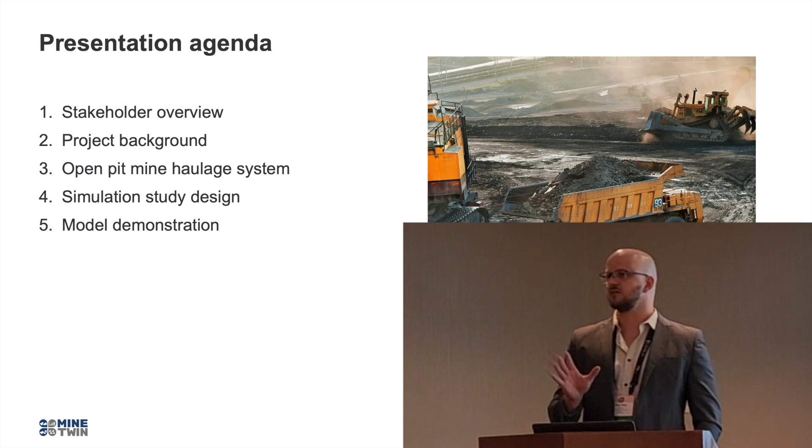Then we're going to have a look at the simulation study design. We're also going to do a very brief model demonstration of MineTwin. We're not going to focus much on the tool itself, just on the parts that were used for this specific study. So it's going to be very brief.

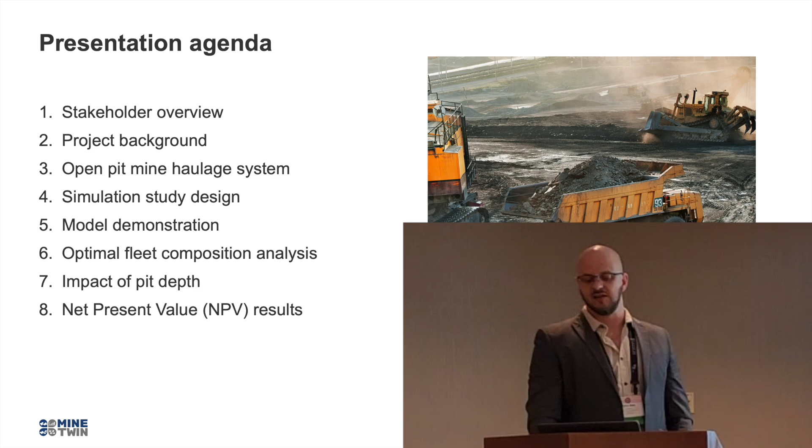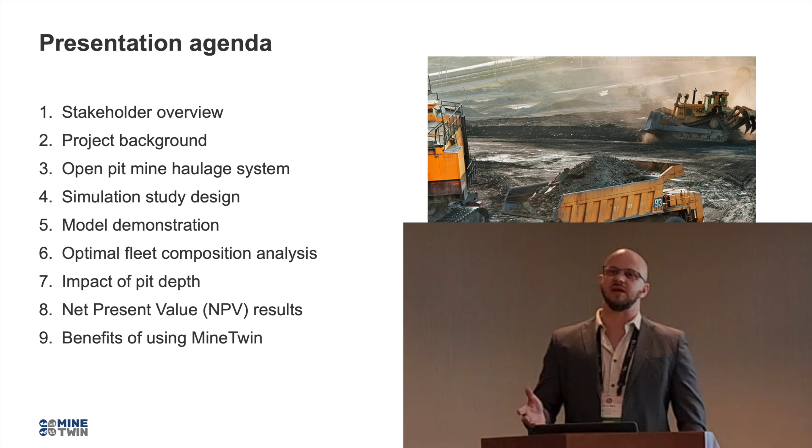We're going to look at the optimal fleet composition analysis, because that, we'll see, is the biggest thing here: what is the optimal fleet for this specific question when you've got manned vehicles and you're moving them to autonomous. We're also going to look at the impact that pit depth has on this question, and specifically the net present value or NPV results from this whole study. And then we're going to do a brief overview, if there's still some time, of the benefits of using MineTwin compared to industry standard and general simulation tools.

So a little bit of background about the project. It originally started with Pronto AI. They deliver off-road autonomous haulage systems, or AHS, and they specifically focus on rugged environments, specific industrial environments as well as mining environments, and also specifically on small vehicles. They managed to bring the cost of automating a small truck and other equipment down significantly compared to bigger trucks. And they wanted a research study to test the financial and operational impacts in mining of moving from big manned trucks to smaller autonomous vehicles.

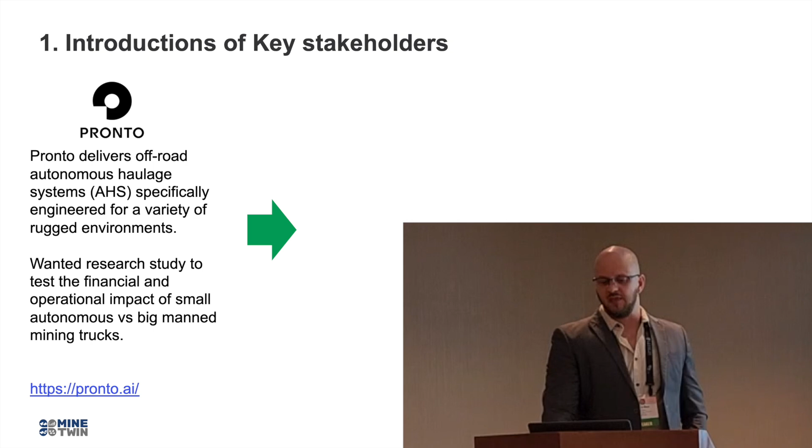And they approached Whittle Consulting to do this study for them. Now, Whittle has this integrated strategic planning, which is an approach that they've used for long-term mine planning, and it considers all parts of the value chain, everything from inputs back into the community to what your mining rates are, to what the life of mine is, to how your pit shell should be designed, how many shells you should have, etc. But for this specific study, because it's kind of new and there's no information available about exactly the number of trucks or excavators for specific setups, they required a detailed simulation to accurately calculate the NPV for the research study.

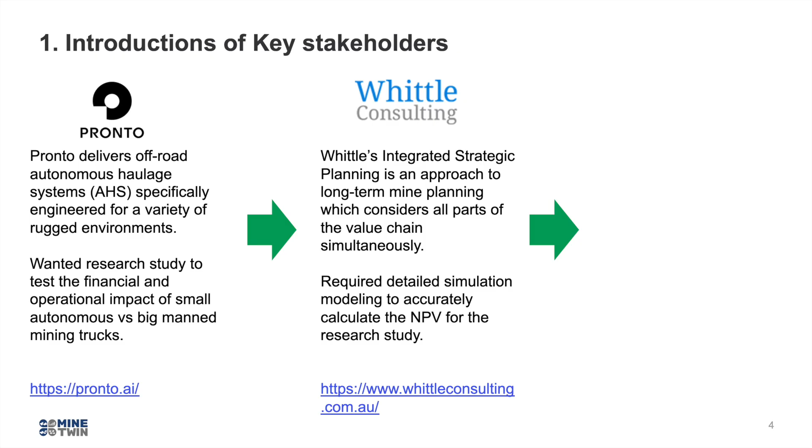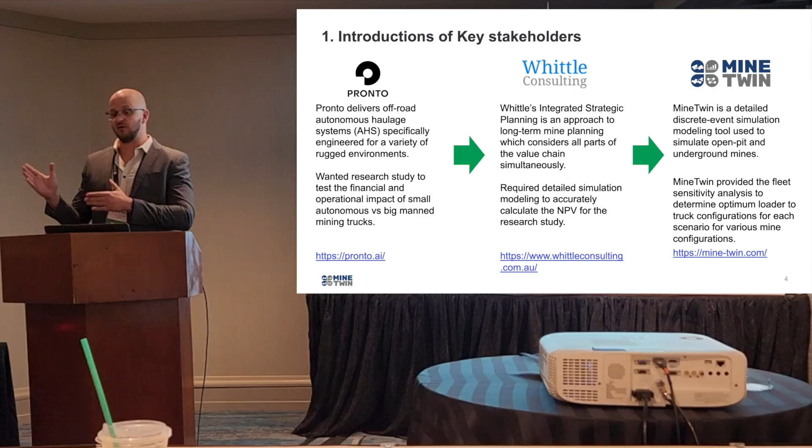And then Whittle contacted us and said, we need a detailed discrete event simulation modeling tool so that we can test all our assumptions and find the optimum fleet configuration. Now, MineTwin is able to simulate both open pit and underground mines, and we provided them with a tool to do this sensitivity analysis and provide the optimum, or the ranges for the truck and loader configurations, for various stages in the life of mine. So I'll hand over to Andrey to talk a little bit more about the background of the project.

Yeah, so what is the object of interest or system of interest? We were asked to compare medium manned versus small autonomous trucks. When I say medium, it's actually quite a big thing. It's a Caterpillar that can carry up to 100 tons, and it's typically paired with that type of excavator, and it's manned.

What is small autonomous trucks? It's still quite big, right? It's small relative to the other mining machines. It's 40-ton Scania that have been chosen to be paired with this Hitachi shovel that's autonomous. That's actually the type of trucks that Pronto guys can automate. Obviously, there's trade-offs that we needed to resolve with the simulation somehow.

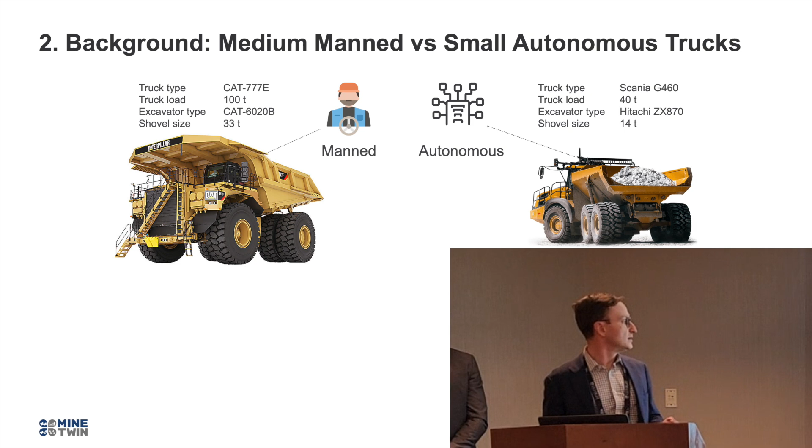So, industry have historically chosen to use the bigger trucks in the mine. Obviously, there's 450 tons in the trucks in some mines, but the bigger the truck, the more efficient the transportation is, the more there is the fraction of the ore that you are hauling upwards as compared to the mass of the truck itself, the mass of its fuel, etc.

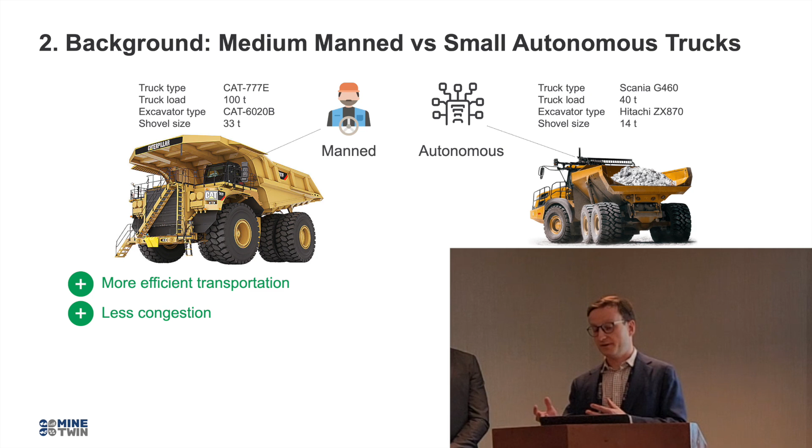So obviously there's less congestion, as there's less moving parts, less probability of congestion, but the negative factors here are human factor delays because they are manned, all sorts of human factors, we factor that in. Uneven truck speed, that's a serious problem.

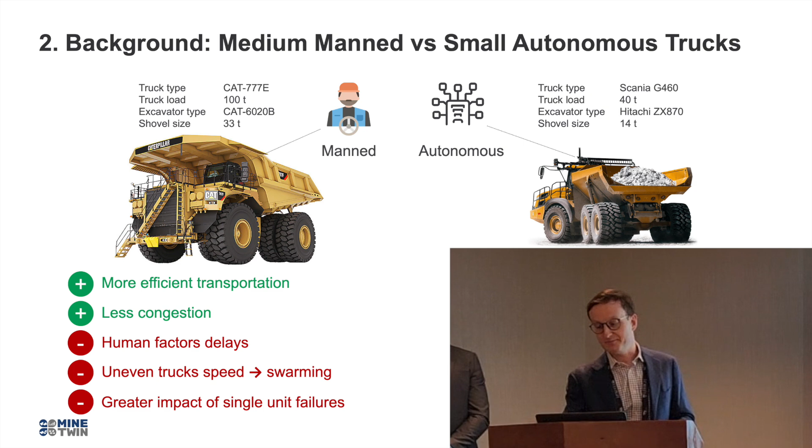That's not very evident on the surface, but all the manned trucks actually drive with different speeds, and if they queue or if they swarm one after the other, they all arrive to the dumping point at the same time. There's additional queuing because of this, and obviously the greater impact of single unit failures. So these trucks are designed to be very reliable because the bigger the truck, the more the impact of its failure.

So uniform speed on the other side, right? If we automate the trucks, be it a large truck or a small truck, we get more uniform speed, probably less queuing, less human factors delays, but we need more excavators because, as you notice there, we need smaller shovels, so we need to buy more of them. How much more, we'll see very soon.

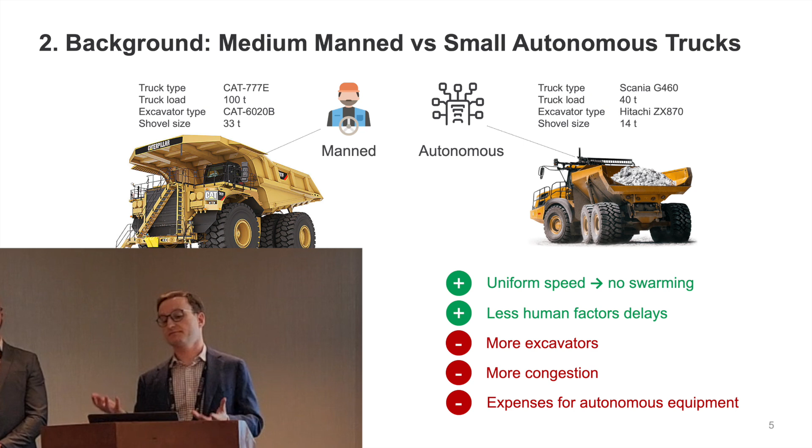And there's going to be presumably more congestion because there's a lot more moving parts. And statistically speaking, there must be more congestion, more queuing in front of excavators, in front of dumping points elsewhere. And then expenses for autonomous equipment, etc. So this has to be considered during the NPV calculation as well. So we use the simulation to actually resolve this trade-off and determine which is the best option.

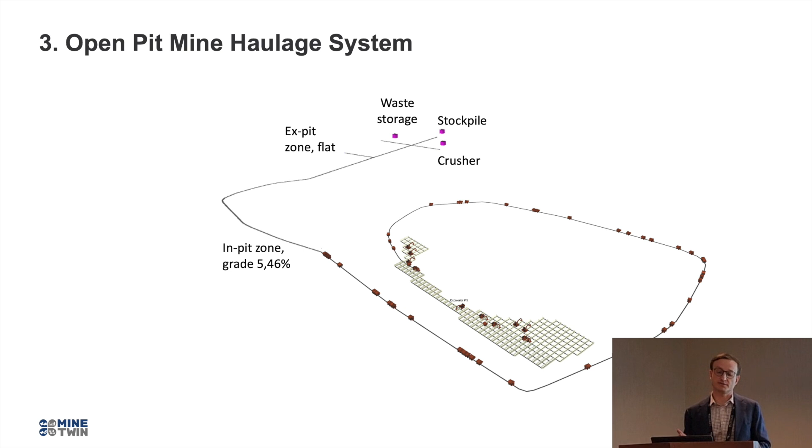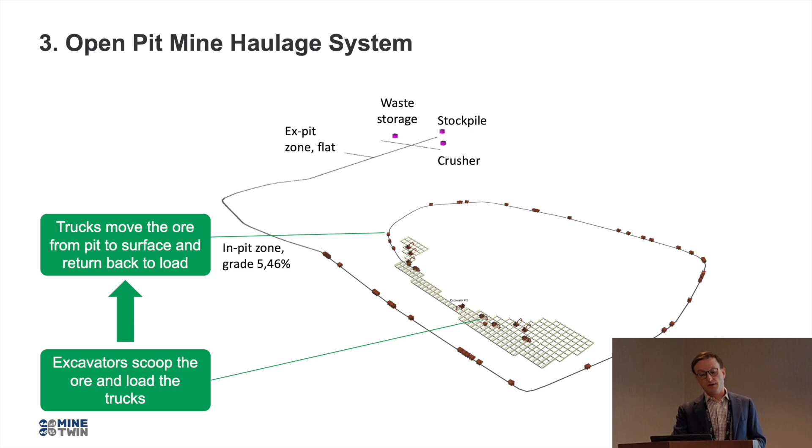So open pit mine haulage system, how it looks like. The very bottom part that looks like a grid, there's actually a grid of blocks where the ore is being excavated. The excavators scoop the ore and put it on the trucks. They travel further upwards. The typical grade is 5 to 6 to 7%, and they travel to one of the destinations, depending on what they mine. It can be a waste storage stockpile or crusher, and obviously this is the flow of the ore.

And what we are interested in simulating is trucks queuing at unloading points, planned and unplanned stoppages. Of course, in the autonomous case, there must be less stoppages due to human factors, less shift breaks, etc. Then trucks queuing at excavators, the biggest problem in mining probably. Excavators waiting for trucks, that's the opposite problem. You'll see very soon what the analysis behind this is. And then trucks swarming somewhere here. So these are all the effects that we needed to simulate.

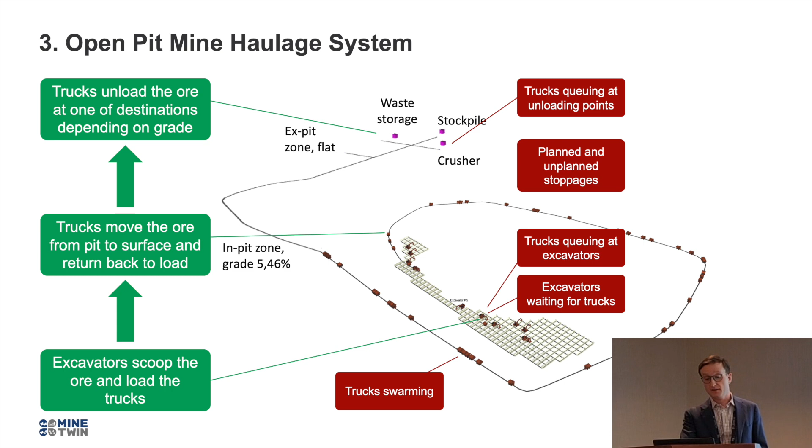So what was the design of our simulation study? We took a sample ore body together with Whittle Consulting guys, with drill and blast open pit mining technology, typical North American setting, copper style ore body. We took the three destinations: stockpile, crusher, and waste storage. It can be sometimes 2 destinations, but we took the setup with 3.

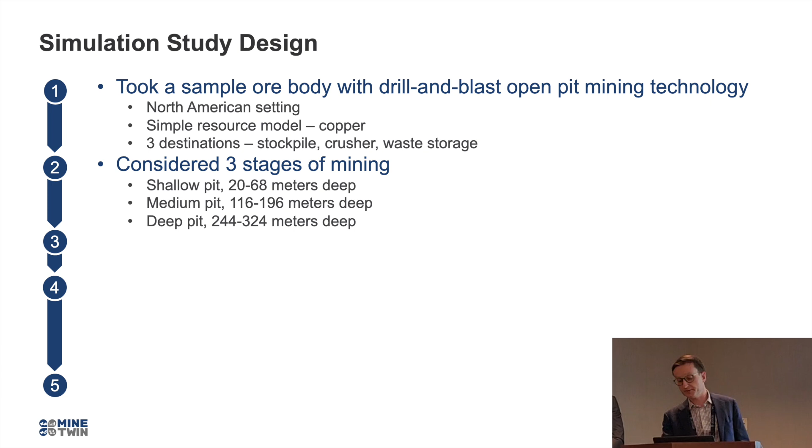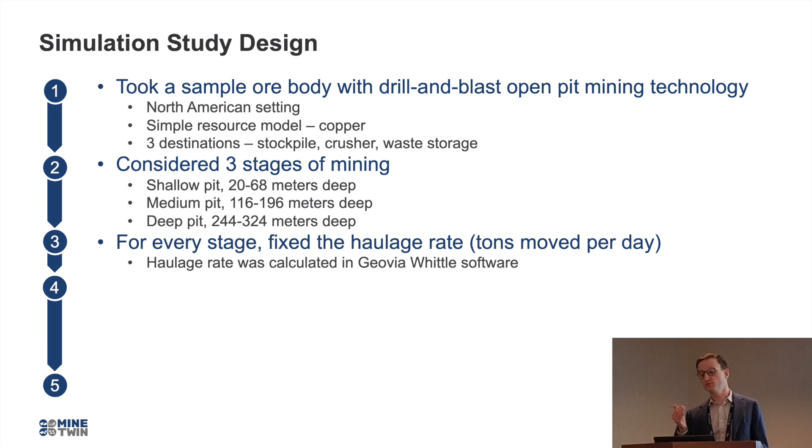We fixed that, and we ran experiments in MineTwin to calculate the required number of trucks and excavators to reach that same haulage rate for every case. And we had several cases, like four fleet types, which is 100 tons, 40 tons, manned and autonomous. That gave us four fleet configurations.

We ran them for all the three stages. For every combination of fleet type and stage, we varied the number of trucks and excavators. Obviously, we applied some replications to find the required number of trucks and excavators to sustain that haulage rate.

Then we externally took the results of the MineTwin simulation and calculated NPV in Excel, because obviously Excel is probably still the best tool for economic models. So we factored in factors like capex, prices, rock movements, etc. So let me hand over to Jaco-Ben.

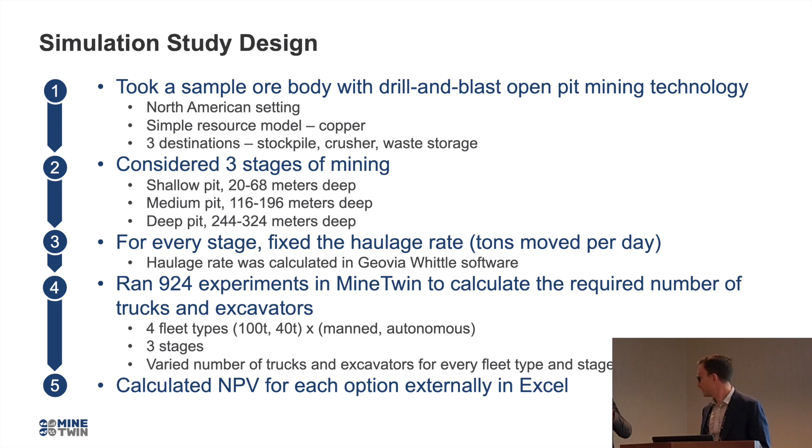So this is the editor view of MineTwin. On the left-hand side, you can see all the data that we read in from a scenario file. The scenario file is just an Excel file. You don't need to go and change anything in the Excel file. It's just the format that we chose for our scenario. Everything is data-driven in here.

Everything from the routes, which you get either from a DXF file or a Deswik file, or you can draw it in manually, all the block data, all the material, all the equipment gets set up in here. So it is the same MineTwin tool that you will use to simulate any kind of open pit or underground mine. So in the editor view, you get to make all these changes.

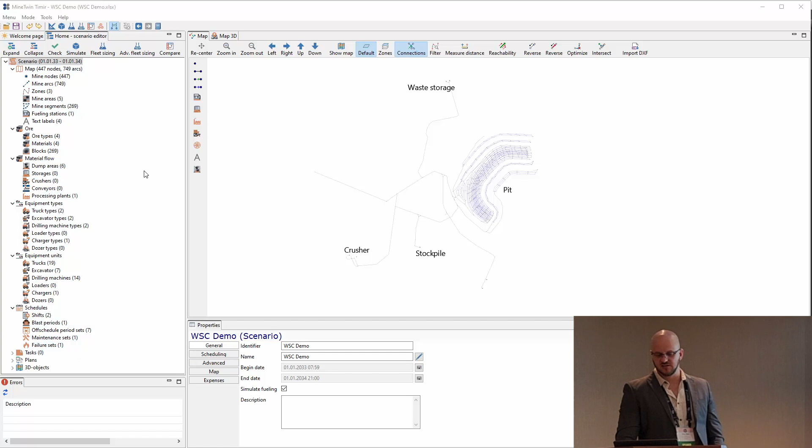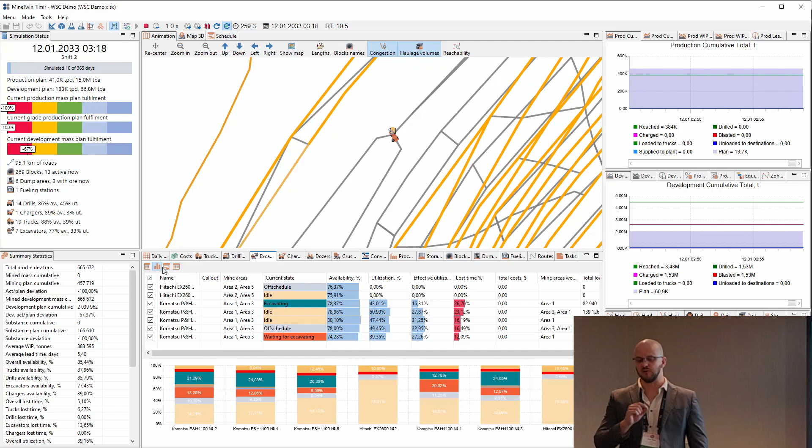Once you're ready, you hit the play button, and now the simulation gets created. There's a scheduler that runs that assigns equipment to different locations. Those yellow parts there are blocks. You can see the excavators going to these blocks, starting to excavate, a truck going up to it, being loaded.

Here in the view at the bottom, we've got Gantt charts that tell you in detail what every piece of equipment that you've selected has been doing, or is planned to do based on the scheduler's algorithm, or is currently doing. Literally, it started at 02:48, it excavated for 6 minutes, loaded into that specific truck. Then you can also view this for every other piece of equipment.

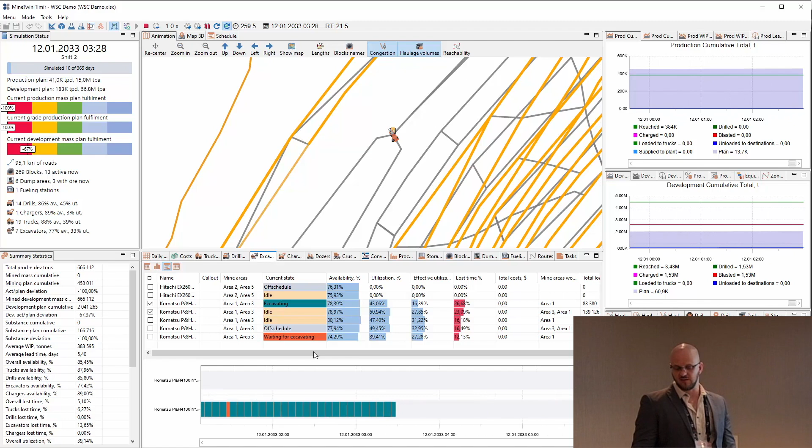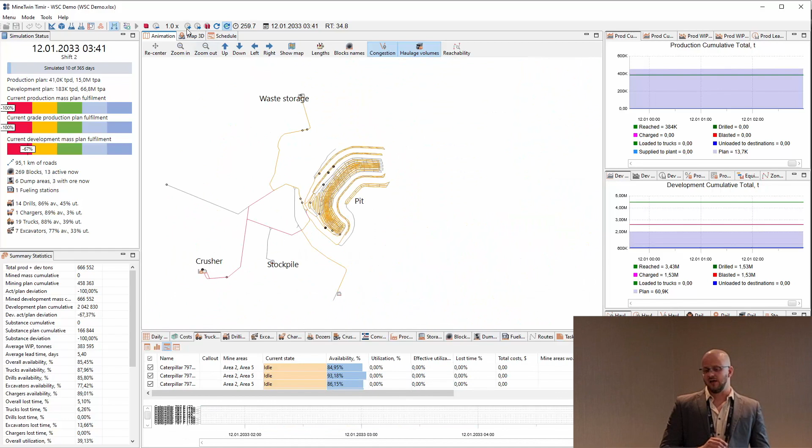So if we look at the trucks, we can see the stacked state charts for how much time they spent in each state. We can click on pretty much anything inside the application to view their current status. There's also a nice 3D view, and here we imported the geometries, the surfaces, so you can get a better visual view of what is exactly happening in your model. So that's really nice for verification and validation.

If the client, or in this case Whittle Consulting, wants to make sure that the way we are mining makes sense. Like, are we mining the benches in the right order? Is it valid what we're simulating? Right? So you really need that 3D view so that it can be verified and validated.

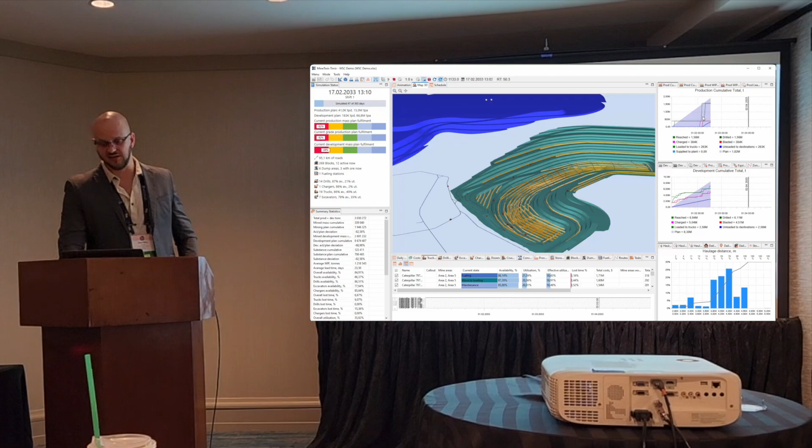The next video is just showing you a little bit more detail about how deep you can go into this. On every single piece of equipment, you can click on it, and it will tell you what it is currently busy with. So this top one is loading, that one is moving to loading, moving to unloading. It tells you how many tons it's carrying, what's the availability, what's the utilization.

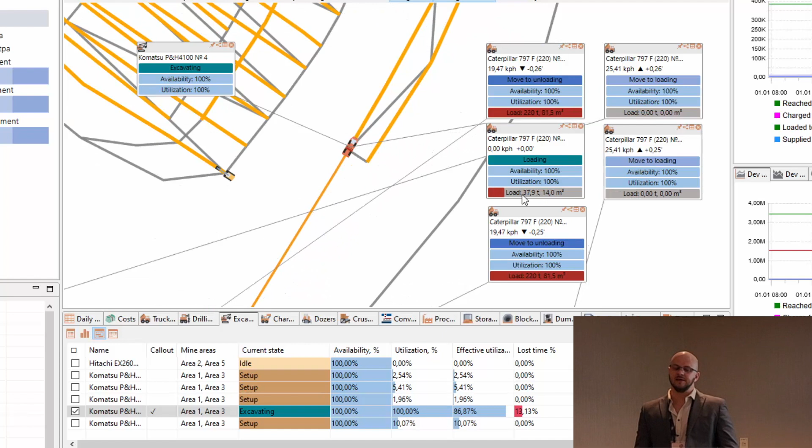You can fix these little pop-ups, and then the line follows the equipment, or you can follow the equipment by default. So there's really an intense amount of detail available for you in the UI that you can use to make predictions, to analyze your current situation, etc.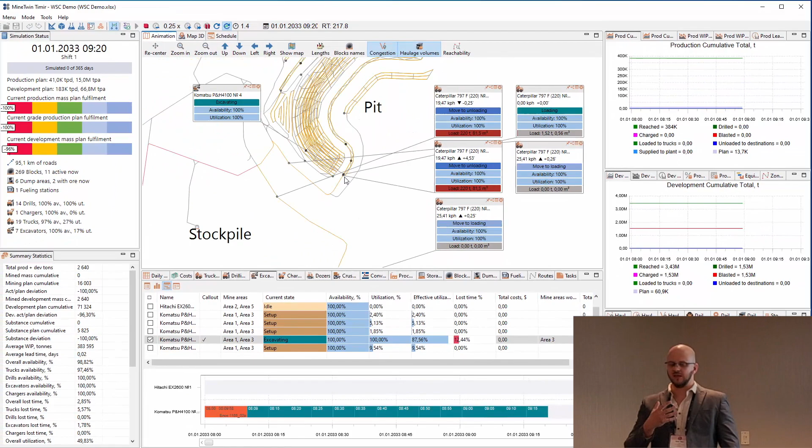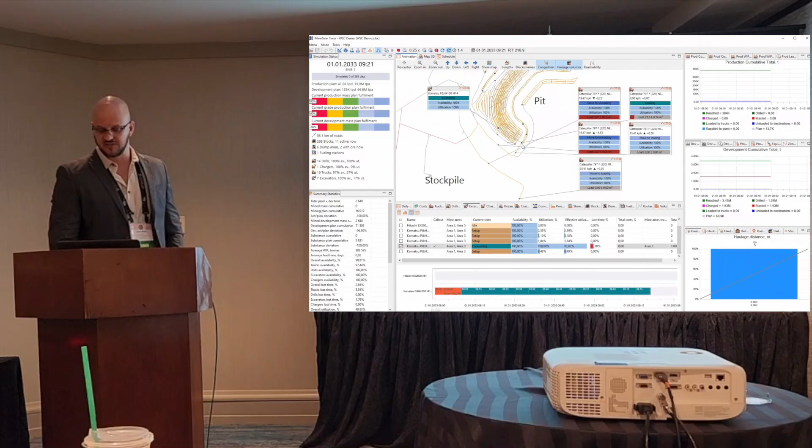But when we get to actually running those over 900 different experiments and replications that Andrey was talking about, you can't run it in this environment, it's going to take forever. Right? So there we set up some batch runs on our server, and we eventually get the massive text file or an Excel file with all the replications and averages, and we analyzed it. And now we need to make a decision on what is the optimal fleet composition for each one of the slices of time that we simulated for the life of mine.

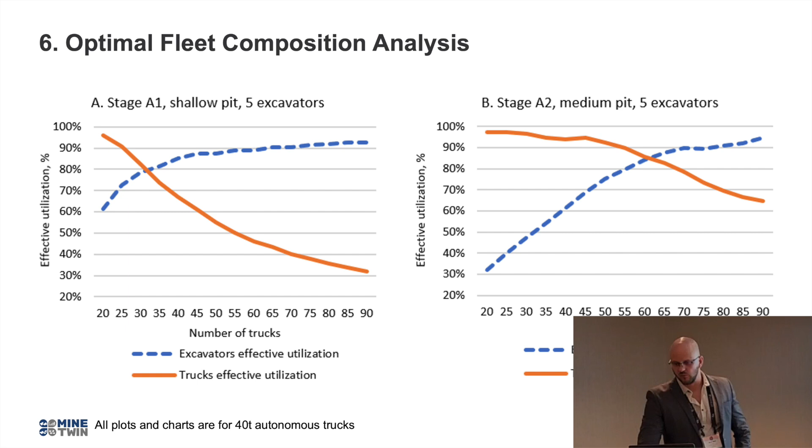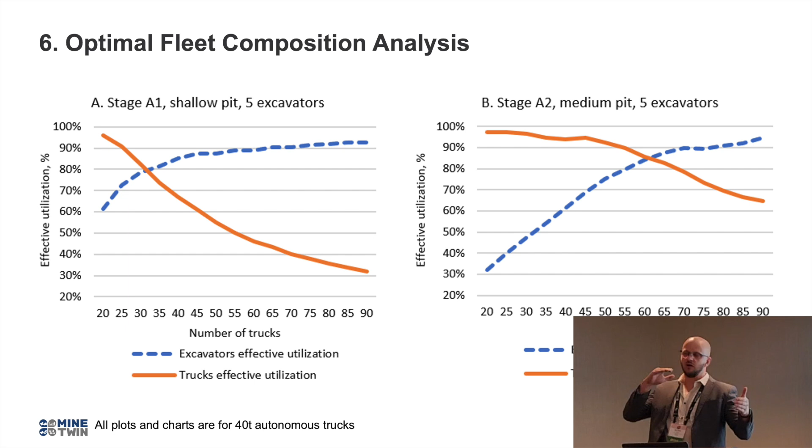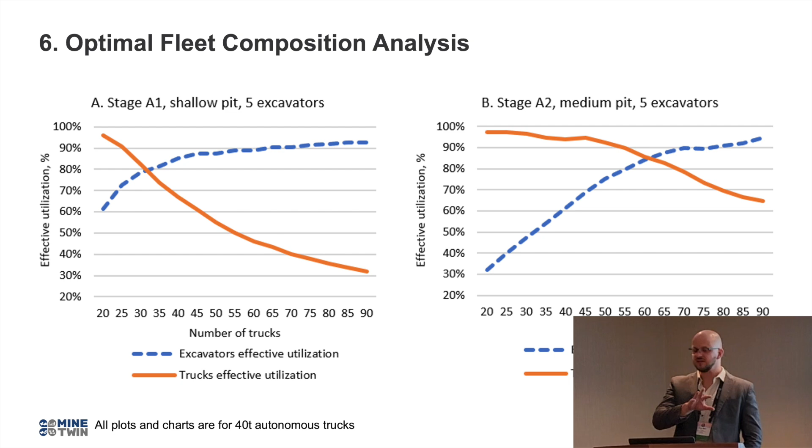Now, we only stop benefiting from adding additional trucks around 60 trucks. And it makes kind of sense. We've extended the distance from the dumping area all the way down into the pit. So we essentially have a longer pipe to fill with trucks to make sure that we do not starve the excavator, right? So in the beginning of the life of mine, we will get by with like 30, 35 trucks, and in that case, 5 excavators. But towards the deeper part of the pit, we actually need to have more trucks to make sure we do not starve the excavators. And this is just 2 of the depths that we actually simulate.

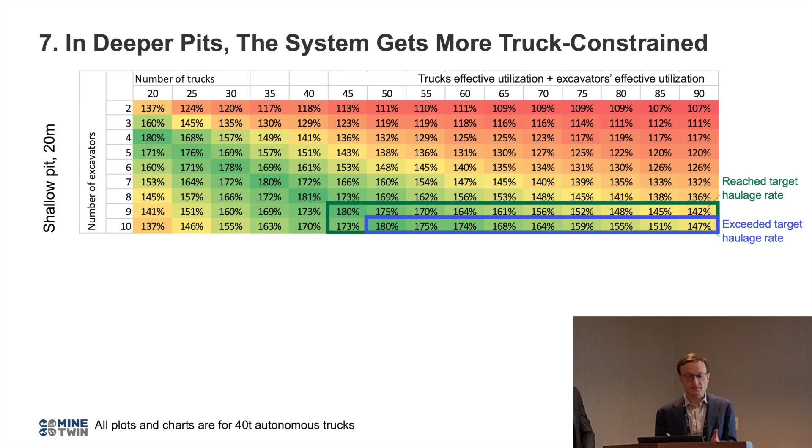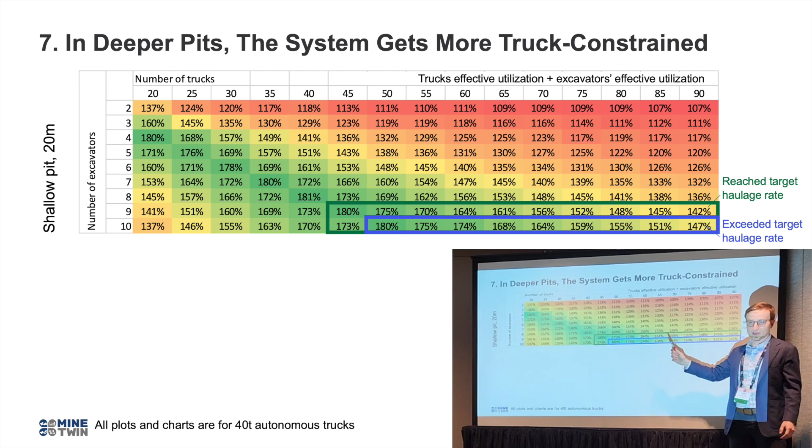So we can look at basically the same data from a little bit different perspective. That's a different type of diagram that presents conceptually the same data, but shows what exactly we did within this study to achieve the goals of this study. So in the cells here, there is a sum of average effective utilizations of trucks and excavators. Obviously, the theoretical maximum was 200%. The greener the cell is, the more effectively we are using our fleet of trucks and excavators.

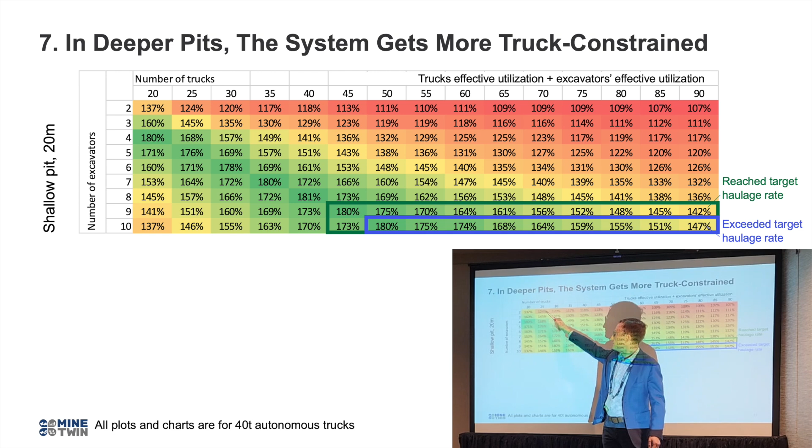So green is good. And you can see here, we are able to use our fleet quite effectively if we have just 20 trucks and 4 excavators. So we'll be good utilization-wise. But ton-wise, we will not be reaching our target. Remember those fixed haulage rates that we compared ourselves against. And obviously there's a haulage rate associated with every cell.

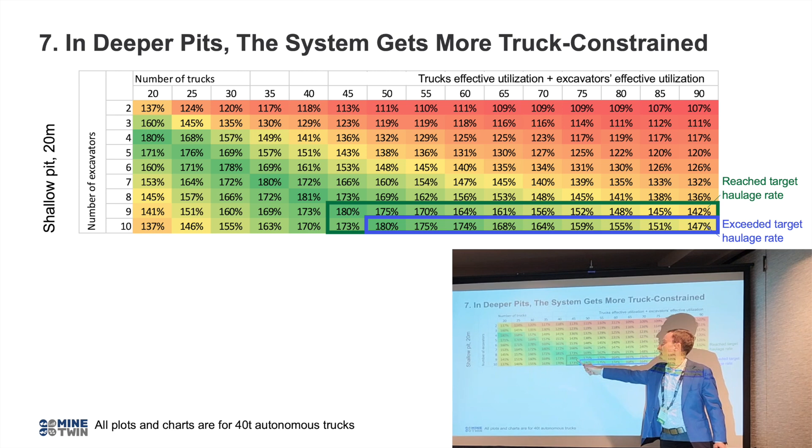Here I just put this green frame to highlight the cases where we were able to reach our target haulage rate. So this is to say, with 45 trucks and 9 excavators utilized quite efficiently, we are able to reach our haulage rate.

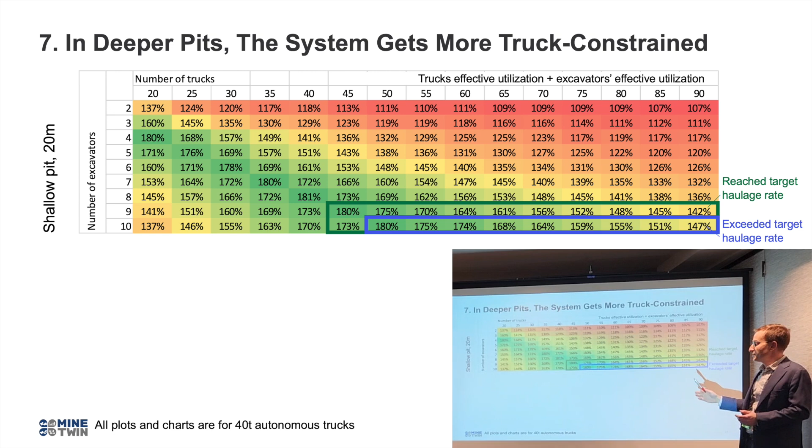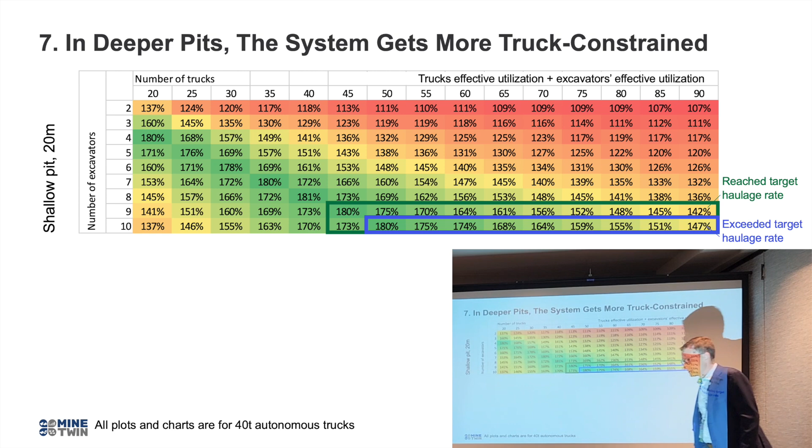And this blue one shows the area where we exceeded the haulage rate. We don't need these cases because we want to compare apples with apples. So we did this analysis for small autonomous trucks, which this picture shows, and the big trucks as well. But here, the second picture is the same small autonomous trucks, but the deeper pit.

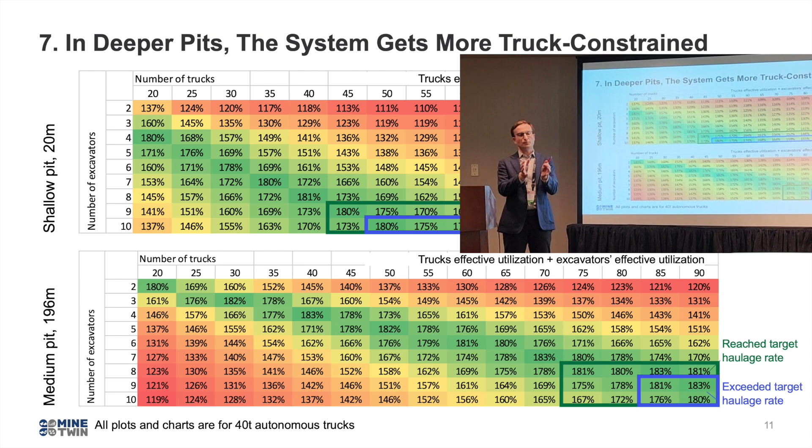So we now went deeper into the pit, so the haulage distance is longer, and there are probably less available dumping points because we start to haul more ore, and all of the ore typically gets to the crusher, and the crusher is a very small thing. There's just a certain amount of trucks that can offload simultaneously at the crusher.

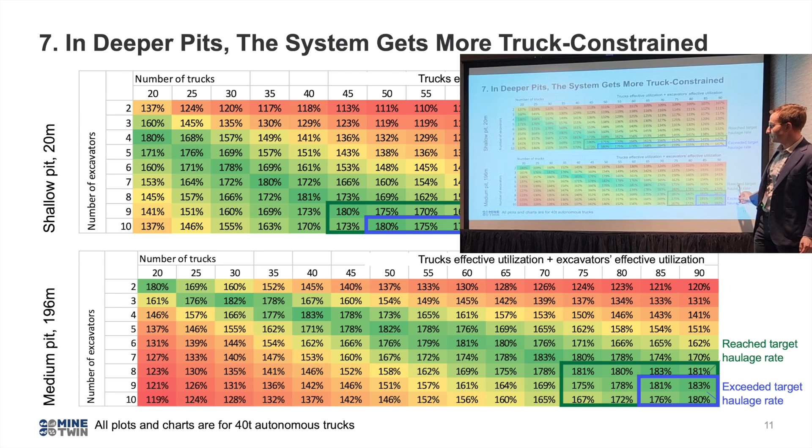And you can see the picture changed. Basically, we have become more truck constrained, or put in simpler words, each excavator now needs more trucks to be efficiently utilized. And here again, we determined that we are able to reach the haulage rate that we were targeting with 75 trucks and 8 excavators. That's actually the final result of our calculation.

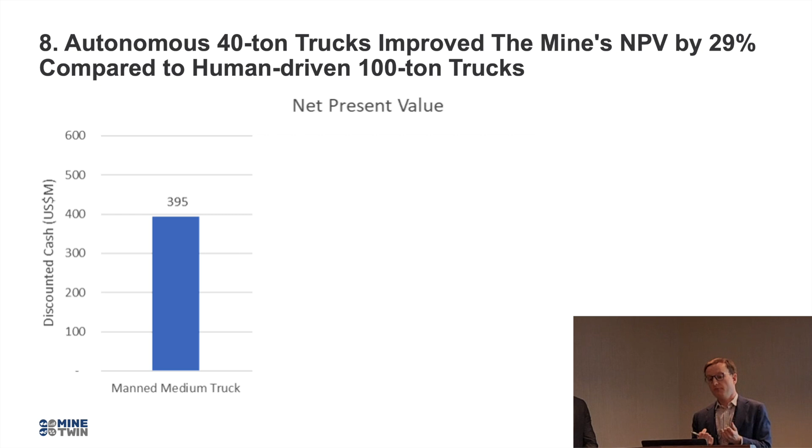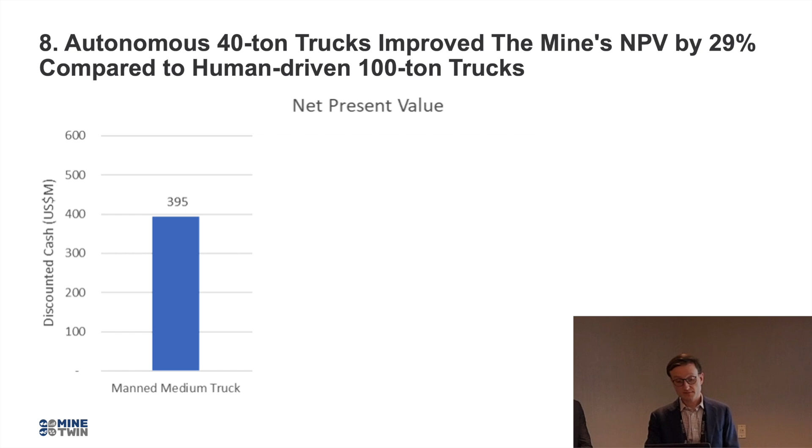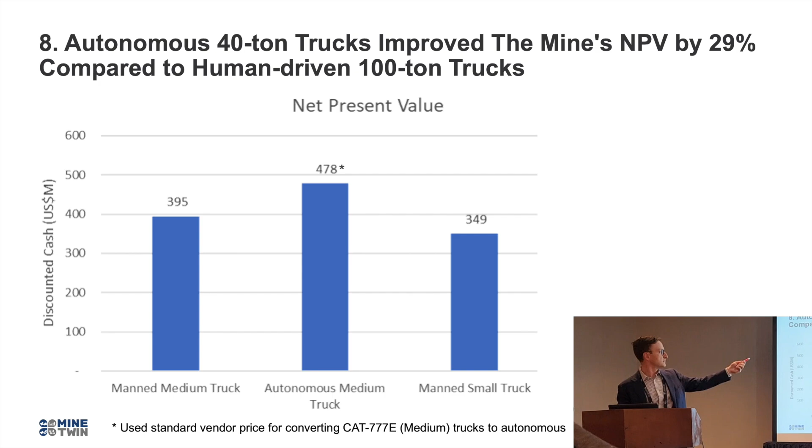But what we took here for the calculation is the standard vendor price from Caterpillar for automating these big trucks, which is quite big. So manned small trucks, obviously industry chooses bigger trucks for a reason. Then autonomous small trucks, NPV-wise, we are much better, like 29% better, because automating the small trucks is much cheaper with the technology of this Pronto AI.

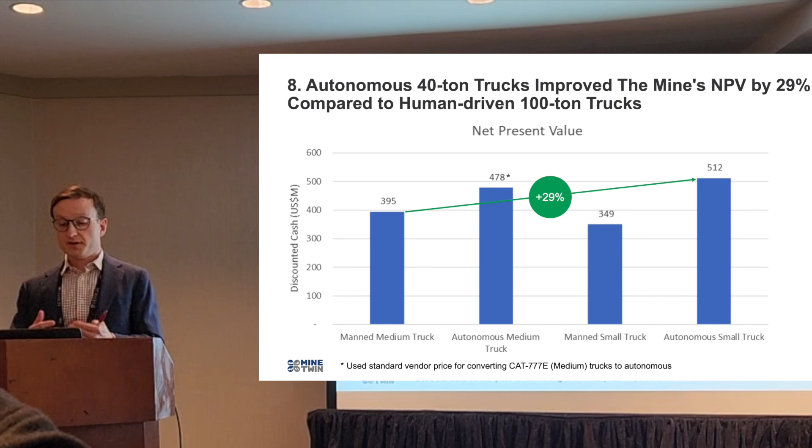Guys, operations-wise, having autonomous bigger trucks is more beneficial. But when we factor the costs into that calculation, that's the result that we get. I will hand over to Jaco-Ben to talk about the data issues.

So we've got the answer now, and the question is how confident are we in the answer? So there's a couple of decision support approaches available for us in mining, and the first one is just static calculations, right? In Excel, you just go, well, what's the average cycle time for a truck to a loader? Okay, I'm not exactly sure how it changes if we've got more loaders, less loaders, more excavators, less excavators, shallow pit, deep pit, etc. So we have to use some averages, average distances, durations, load sizes, etc.

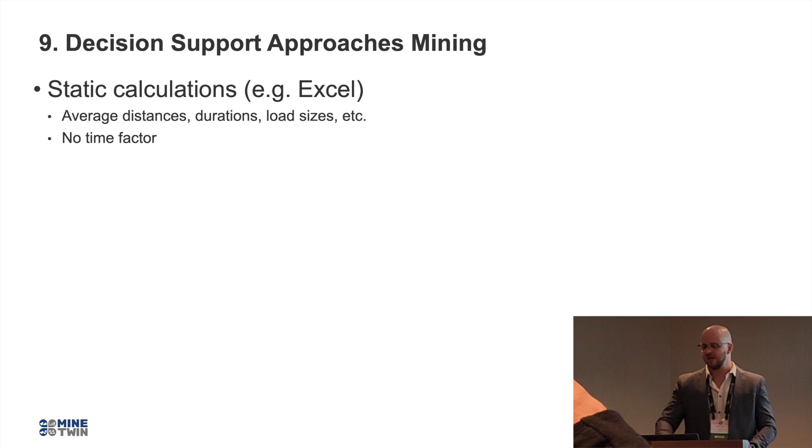And unless you invest a significant amount of time, there's no time factor in your model, right? Maybe you create multiple columns and every 5 minutes is a column. So that is just a high-level calculation that you can do. Now, there exist semi-dynamic calculations and some industry standard tools here, but most of them only simulate the excavation part. And they've got an approximation of trucks to shovels, so you allocate your shovels to specific locations in the mine, you allocate your trucks, and it simulates kind of the same distances throughout the simulation period. And it does not consider drilling, blasting, excavator relocation, etc.

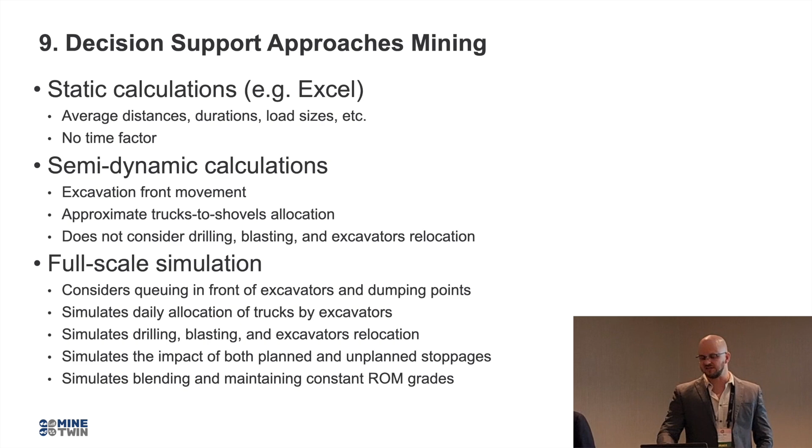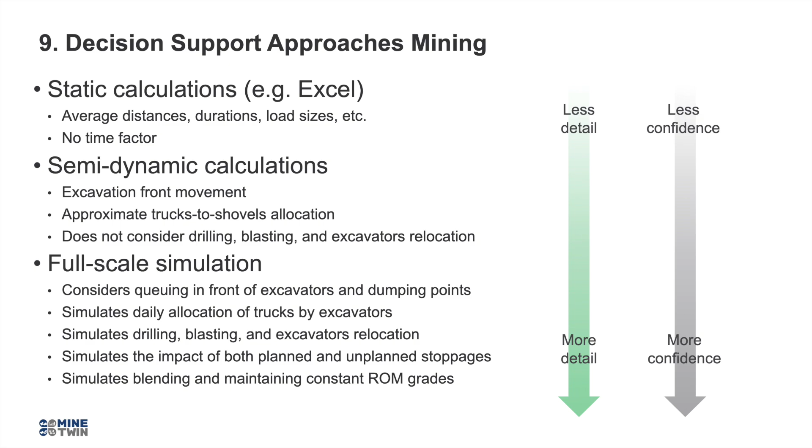Now, if you go to the far end of the scale, you've got a full-scale simulation, and this can consider your queuing in front of excavators, the dumping points. You simulate the daily allocations of trucks by excavators, you simulate unplanned and planned breakdowns, drilling, blasting, etc. And if you move from the top to the bottom, you obviously require a lot more detail to input into the model, but you also get way more confidence in your answer, right? So you're able to simulate and take care of more aspects of the mine if you move down to full-scale simulation.

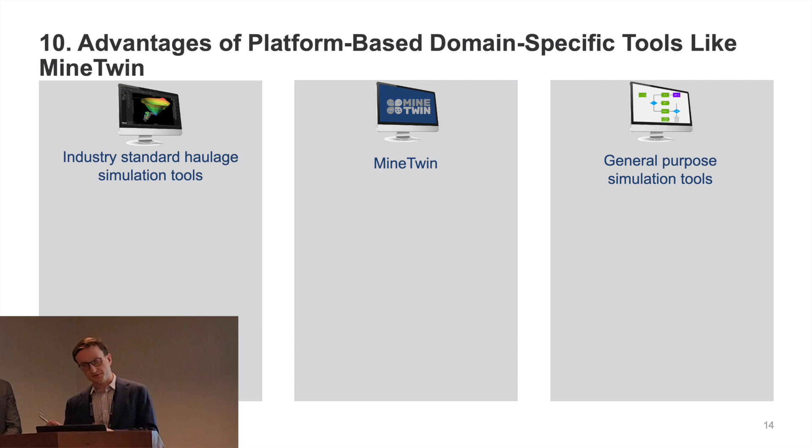Yeah, so probably the last meaningful slide is now we kind of realize that we need to do the simulation, but what are the options here? Basically, there are 3 options. The first one is using industry standard haulage simulation tools. There's a couple of them. And the other end of this is building simulation using general purpose simulation tools like AnyLogic, Simio, whatever. And somewhere in the middle there is this MineTwin tool, which we are presenting here.

So the quick discussion of advantages and disadvantages of each approach. We believe that it takes the best from two worlds. Obviously, we're a little bit biased.

As standard tools from the industry, MineTwin has inbuilt standard mining processes, objects, and reports. It also has a library of standard equipment types and models with typical characteristics. Of course, they need to be validated from case to case. And obviously, the ability to import geometric and geological data from industry standard formats like Deswik or Micromine, whatever.

From the general purpose tool, we take the ability to implement scheduling and coordination logic and customize it with code. There is a basic scheduling logic, which is good enough for some cases. For the others, you can use Java code to specify the details of this logic, and the ability to add custom objects and processes, which is not possible in industry standard tools, but here in MineTwin, you can do pretty much the same as what you can do in AnyLogic, with the difference that you have to code in Java as opposed to drag and drop and code from time to time.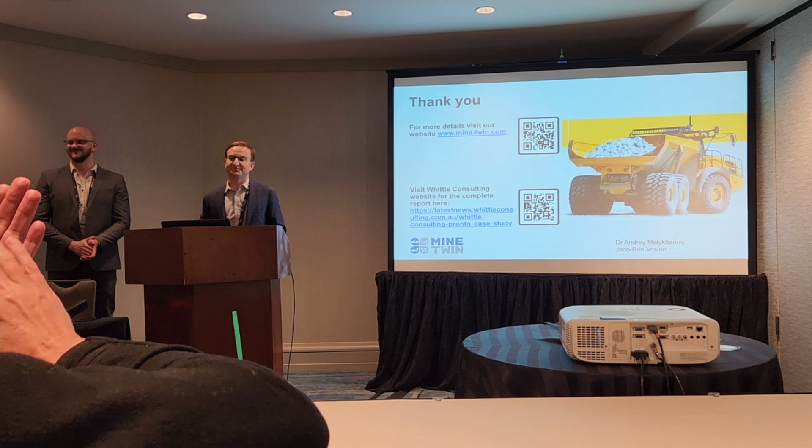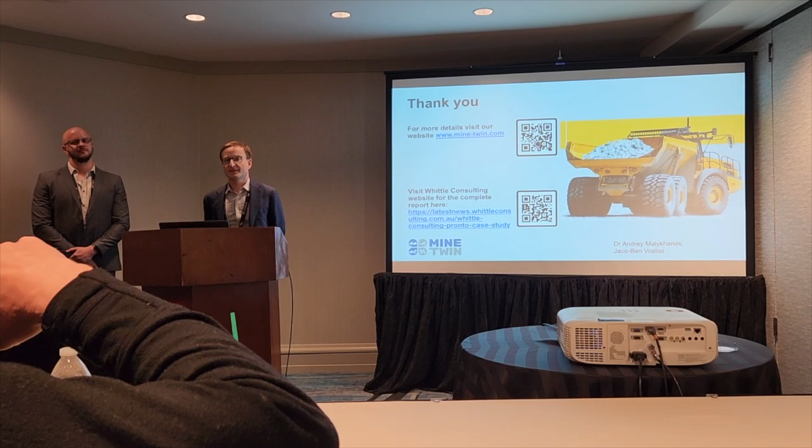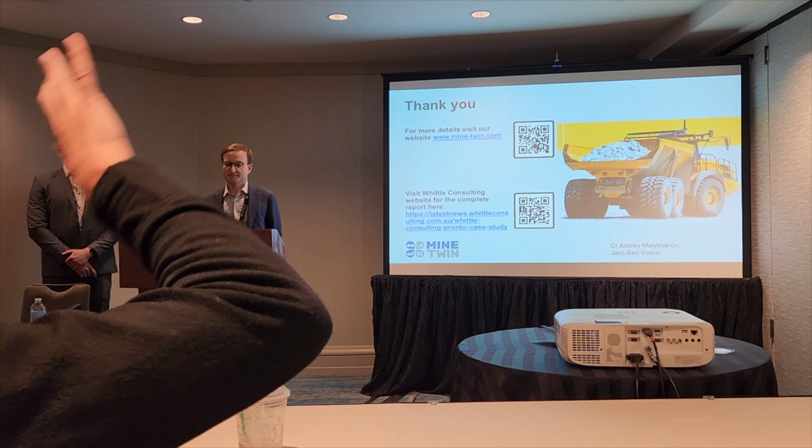Andrey, what were your assumptions regarding OPEX and CAPEX? When I served on the advisory board for BHP at the time, the big downside of the autonomous vehicles was that there was going to be a 1-to-1 and maybe even a 1-to-2 increase from drivers to maintenance crews, because the autonomous was still very unreliable and often had to be removed off-site to get maintenance done, etc. What was your assumption?

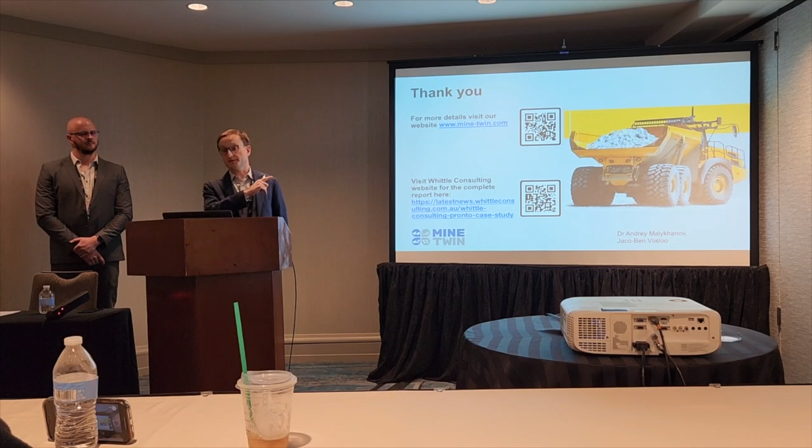The maintenance intervals were longer from the operational standpoint. The maintenance prices or repair prices for autonomous equipment were provided by that vendor, Pronto AI, and Caterpillar as well. So we just took those numbers into the NPV calculations. But if these assumptions change, we can still reuse our simulation results because we just simulated the physics, not the economics. The economics were done fully outside the simulation in Whittle Consulting's cost model.

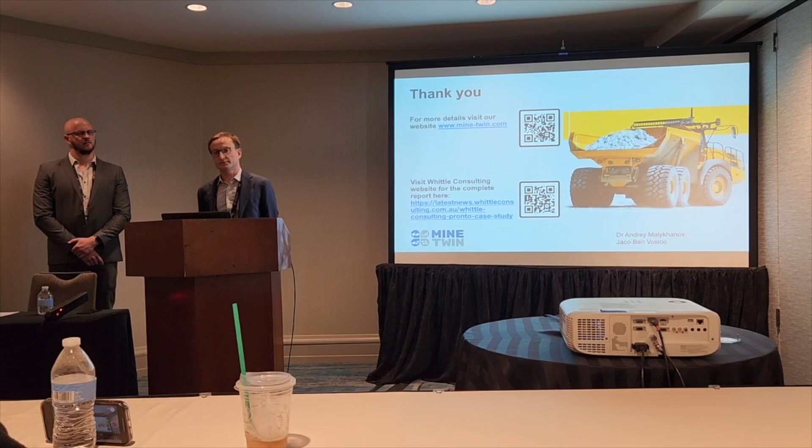But in general, your assumption is that maintenance on the autonomous will go down? No. The maintenance stays the same, and we just added small additional maintenance where they think they would have to maintain the automation equipment outside of the standard maintenance cycle. So the availability changed by less than 1%. But the cost is something that is completely outside.

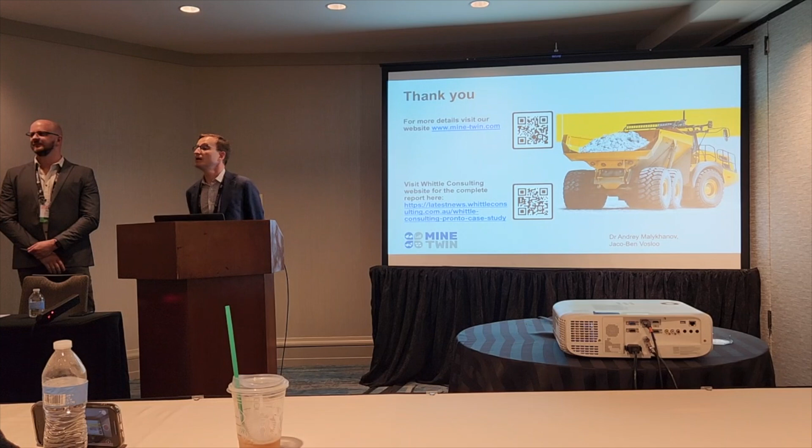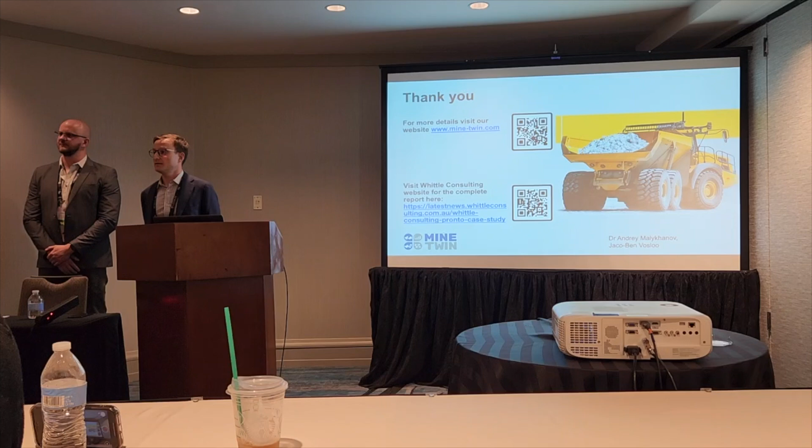This is one of the nicest simulation talks I've heard at the conference so far, so good job. A quick comment and then a question. The comment is, it seems to me that this is really set up to be a move to the digital twin level, and I think that's a nice next step. The question is, these are autonomous vehicles. Does that mean that there's no interaction, or do they actually get loaded up, somebody hits a button and then off they go? No, they are fully autonomous.

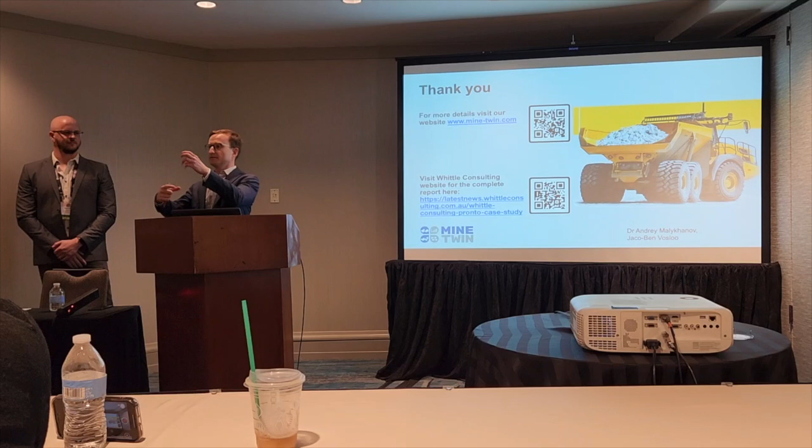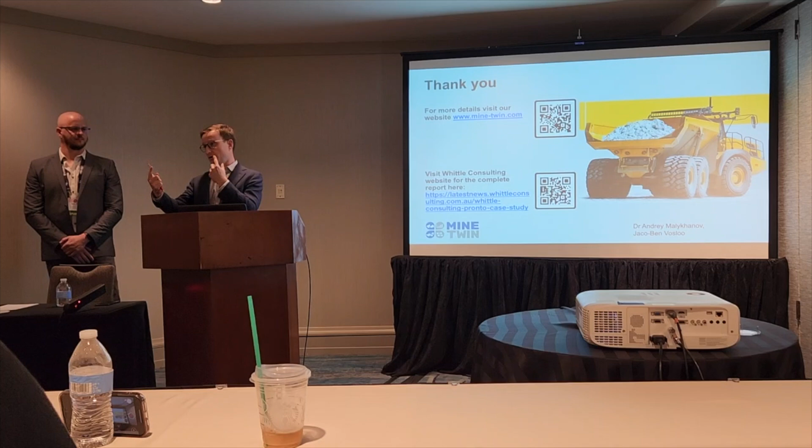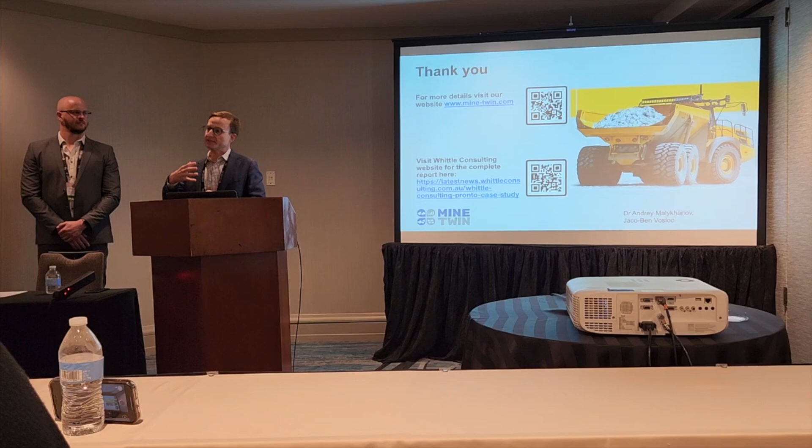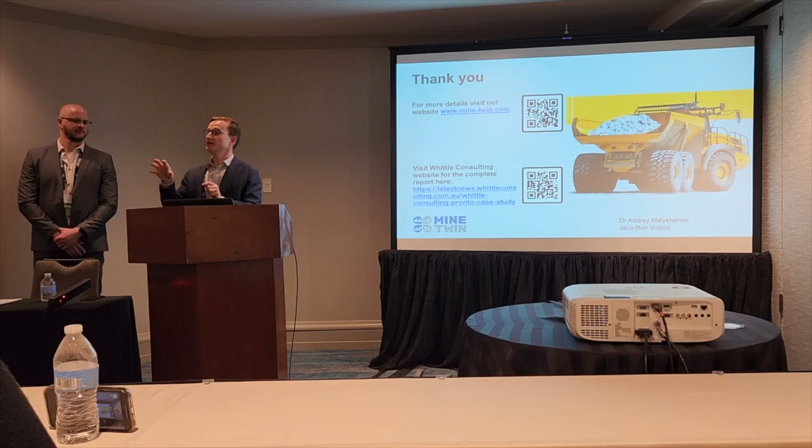They sense the excavator, they sense the event when the excavator finishes loading them, and then they go. They are coordinating between each other. And there are pre-assigned routes, and the roads where they operate are fenced to some extent. But the innovation from the Pronto guys is they provided some safety mechanisms with lidars, I think, that allow these trucks to operate together with manned vehicles. Like if there are manned service vehicles, they can be allowed to drive the same paths as these autonomous things. Thank you.